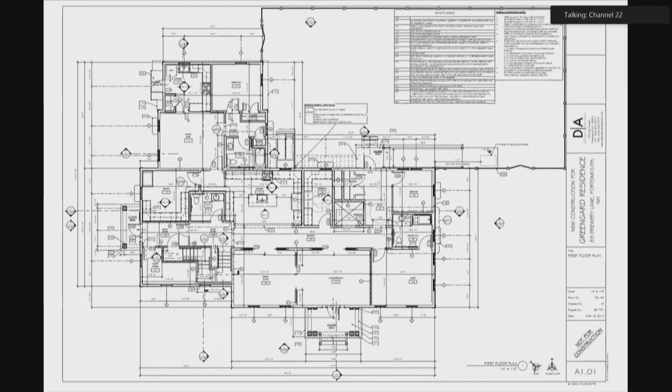If you go to the next page, and then up in the top right, you'll see—I can't read them very well from here—but the larger areas to the left, center, and lower right, those are rooms, living quarters for 4 of the existing 5. The other is on the first floor, on the page we just looked at. Up at the top right was originally the staff room. Well, the operation of the facility has changed somewhat, so there is no longer a full-time resident living in that apartment I showed you on the earlier page.

So what's happened is there's simply no need for the staff quarters up in that top right of the image, because that use is now in this old apartment where the house parent or live-in parent used to reside. There's also a formal supervisor on call now, which they didn't have back then. So somewhat oddly, we need a variance rather than a special exception to go from 5 to 6 residents. But there are other, more intensive uses that can be done by special exception—a residential care facility for more than 5 is more intensive but doesn't require a variance. So it's somewhat of an anomaly in the ordinance, in my estimation.

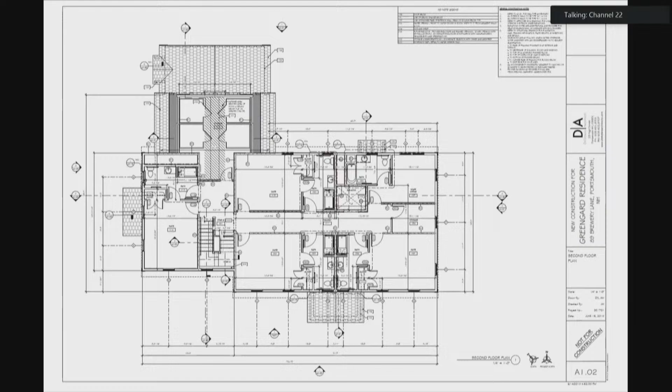You probably will hear from the parent of this young man, who I was introduced to and I already forgot her name. Before we hear from them, Attorney Phoenix, is there any questions from the board as to the presentation?

Mr. Rheaume: Thank you, Madam Chair. So taking a look at the general area zoning map that you provided, it's on page 47 of our packet. The CD4L2 that your client's property falls into mostly goes down Islington Street, then kind of makes a left-hand turn, going up along Albany Street and then onto the privately owned way. CD4W is on the other side.

CD4W, the assisted living center, is allowed by right. But on the opposite side of your client's property, the GRC, once again, it is not allowed to have an assisted living center. So I'm just trying to understand, you're kind of forming a buffer between those 2 zones. Is there anything else about the nature of your client's property that would help reassure us that the buffering would take place with the 6 residents up against the GRC properties along Cass Street?

Fair question. My response to that is that, to the best of my knowledge, there haven't been any issues between the neighbors and the existing 5 residents that have been there for now, roughly 7 or 8 years. I don't remember when it was built, but the second approval was in 2018.

You can speak to that in a minute. So the adding of 1 additional resident, in place of someone who used to have a car there and park, an adult who would be coming and going as anybody else who lives in an apartment, that's no longer going to be necessary. So the overall intensity, I would argue, is less than it was when it was approved as a special exception. Barbara or Tanya, you have to come up here and introduce yourself and make a comment.

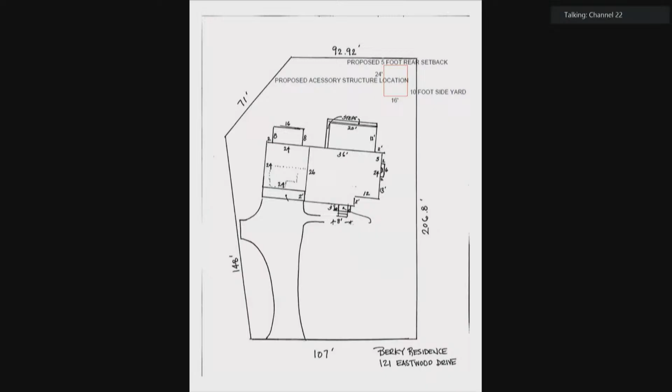Thank you, Madam Chair. Taking a look at some of the photos you provided, in particular the one on page 88 of our packet, it shows that back corner, which is your proposed location for this shed structure. I'm curious, there seems to be quite a bit of topography going on with your property. To the left-hand side of the photo, the land seems to be sloping down. Nearer to the front of the photo, you've got quite a bit of ledge, and then a higher step. What aspects of the topography are driving your location for the shed and maybe pushing it closer to that back property line?

Yeah, so as you can see, that's all ledge over there. If I was forced to come forward, that would require blasting or an excavator to hammer out the ledge, or else it would require a significant concrete wall to come up to match the ledge that's already there. So you'd have in the backyard a potential 4 to 5 foot concrete wall exposed from the ground up, which doesn't really do anything for the backyard—that would hurt everybody, having to look at that. When I bought the residence, the steps had changed; that was just a slope when we did some landscaping. But that area has been untouched, other than some stone put on top, since I've owned the residence in 2014.

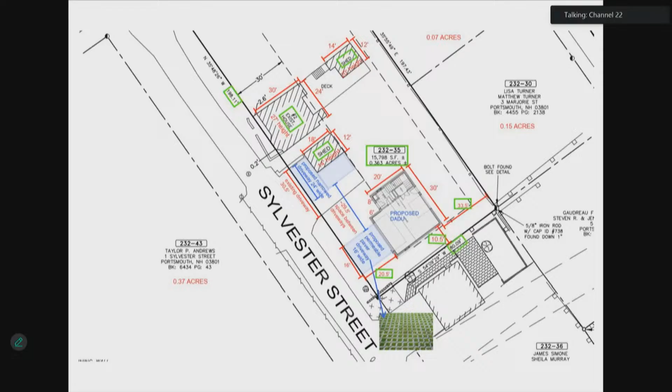Granting the variance for a second driveway for a property which has a total street frontage of approximately 277 feet would allow us the same use of the property which has been allowed to the neighbors. Thank you for your time and consideration.

Thank you, Ms. Rogenbach. Is there anybody who has any questions for the applicant?

Is there anyone here who would like to speak in favor of this application? Is there anyone who would like to speak in opposition to it? No one online? And is there finally anyone who would like to speak to, for, or against? Thank you. With that, I'll close the public hearing and open it to discussion by the board.

Mr. Rossi? I'm prepared to make a motion to approve the variance application as presented and advertised. I'll second. Okay, Mr. Rossi, your motion, please. Well, my motion is to approve the application as presented and advertised.

The accessory dwelling unit is allowed by right. The location of the accessory dwelling unit requires no variances, so it is allowed by right to be in that particular location.

I do think this is an interesting early case for us to understand that as more accessory dwelling units are permitted, we do have to consider how people will actually get to and from them. In this case, having a second driveway to access the accessory dwelling unit in its rightful location is logical. The denial of a variance to allow that would be completely irrational and would contravene the intent of allowing a detached accessory dwelling unit. So literal enforcement of the driveway provision would...

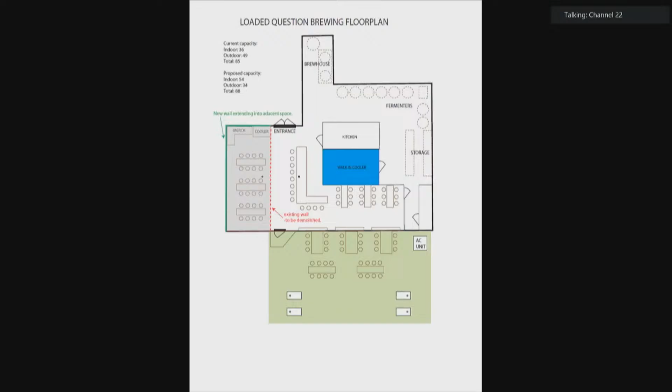One is, will there be a hazard to the public or the property from fire, explosions, or release of toxic chemicals? We're not doing anything that changes our current operations. The fire department has looked at our operations, we're considered safe, and that's not going to change at all.

There's questions about whether it'll change any of the essential characteristics about the neighborhood, including additional odor, smoke, gas, dust, pollutants, noise, heat, et cetera. Again, we're not changing any of our operations, so that will not change at all.

And because we're recessed pretty far off the road, I don't anticipate it affecting those at all. In terms of affecting municipal services, water, sewer, waste disposal, et cetera, again we're not changing really any of our operations. A few additional customers should not affect this significantly.

And then there's some questions about permeable surface and stormwater, one of the criteria we need to meet. Again, we are not changing anything outside of the building. We're adding the additional square footage by pushing into an adjacent existing space, so that's not going to affect the permeability, and it shouldn't have any effect on the desirability of the neighborhood or property values. Again, it's all indoors. With that said, I'm seeking a special exception to that. So, kept it pretty short for you. Any questions from the board?

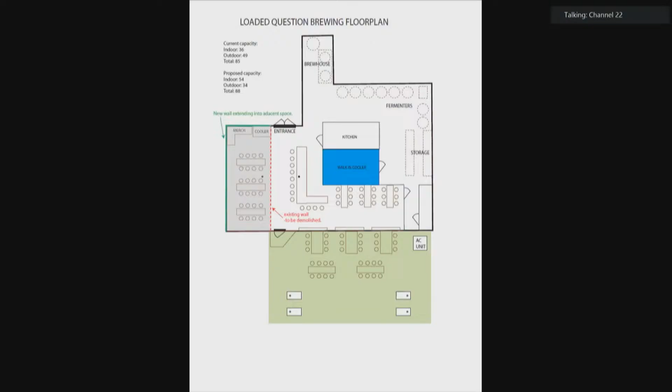I thought I was losing my mind. Nope. Any other questions from the board?

Okay, thank you. Is there anyone here who would like to speak in favor of this petition? Is there anyone who would like to speak in opposition to this petition? And is there anyone who would like to speak for or against? Seeing no one rise and there's nobody online, I'll close the public hearing.

Madam Chair, I have a question. For staff - I will not close the public hearing yet. You can close it.

On January 28th, 2025, the board granted the request to allow a restaurant which requires the following special exception: to allow a restaurant with an occupant load of 50 to 250. That was for Louis.

That was for the what? That was for Louis, the other restaurant on the property, same address, but different part of the building. Oh, I see how that is confusing. I got to clear that up in the meeting.

I thought that was specified in the packet too. It's confusing because it's the same, well, it's the same address, so. Yep, okay. Are there any other questions before I close the public hearing?

Okay, public hearing is closed, and I'll open it to the board's discussion. I'm prepared to make a motion to approve the special exception as presented and advertised. Okay, is there a second?

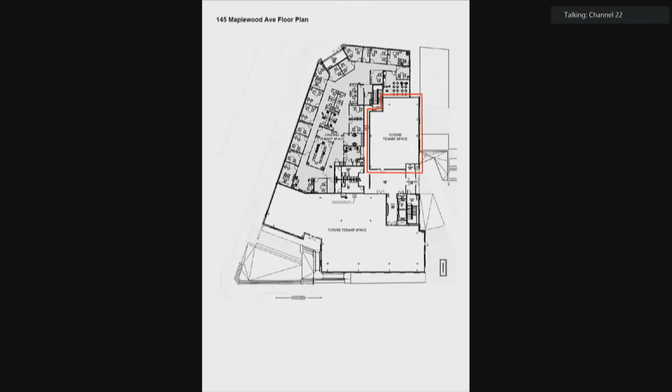Did you address stormwater runoff? I'm not sure, I kind of lost track. The last criteria is number 6. Yep, no proposed changes to the building footprint. Therefore, there will be no increase to stormwater runoff to adjacent properties or the public right-of-way.

Okay, thank you. Does anybody have any questions for the applicant? Thank you very much. Thank you, guys.

So we'll open this up to the public now. Is there anyone here who would like to speak in favor of this application? If you could just please identify yourself. Abigail Bachman, B-A-C-H-M-A-N, with Colliers, a commercial real estate brokerage in Portsmouth located at 210 Commerce Way.

I have acted as Matt's broker throughout this transaction. I just want to speak to his character and to his business. I think it's a phenomenal amenity to this building as well as to the downtown area, to add to the existing fitness uses that are there now. So, thank you. Okay, thank you.

Is there anyone else who would like to speak in favor of this application? There's no one online. Is there anyone who would like to speak in opposition? And is there anyone who would like to speak for or against? And seeing no one rise, I will close the public hearing and open it up to consideration by the board.

Board? Mr. Nies? I'm prepared to make a motion if there's no further discussion. Your motion, do we have a second? I haven't made it yet. Sorry. I move to grant the special exception as presented and advertised.

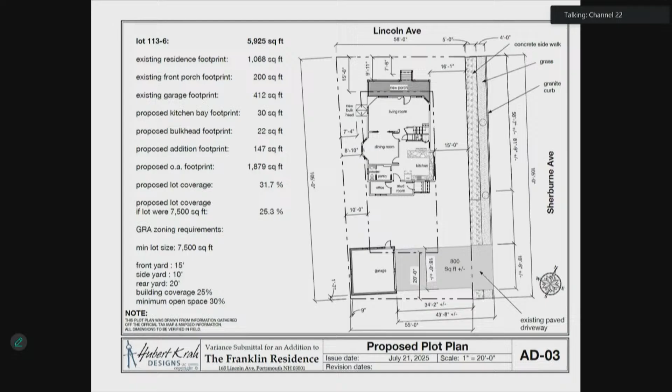Okay, great. Granting the variances will not be contrary to the spirit and intent of the zoning ordinance or the public interest. The plans call for the Franklins to actually reduce building coverage by 1.7% from what exists, so therefore there wouldn't be any overcrowding of structures on the property. I did include an exhibit as part of my written narrative that demonstrates what the surrounding building coverages are. This is pretty much in line with what the neighboring properties have. Certainly doesn't exceed the neighborhood average.

As I had already pointed out, the proposed bulkhead is really what's driving the additional setback relief that's being requested beyond what already exists on the property, which is a fairly minimal request overall. And I would just point out that the existing non-conforming rear deck, that one corner of it does encroach into the same setback. That's obviously being removed and replaced with a conforming addition, but for the coverage relief being sought. So for these reasons, the proposed improvements will not alter the essential character of the neighborhood or negatively affect the public health, safety, or welfare.

Substantial justice will be done in granting the variances. Can't really think of any public interest served by denying them. However, the Franklins would be at a loss if denied the opportunity to improve their home in a reasonable manner, such as this, make it more functional for their family.

So for these reasons, it would be an injustice to deny the variances. Surrounding property values will not be diminished by granting the variances. I would argue that the architecture improvements associated with the renovation are in keeping with the character of the neighborhood, many of the homes and structures surrounding this property. If you look at the plans, it's a very tastefully designed renovation. So for these reasons, property values will not be diminished.

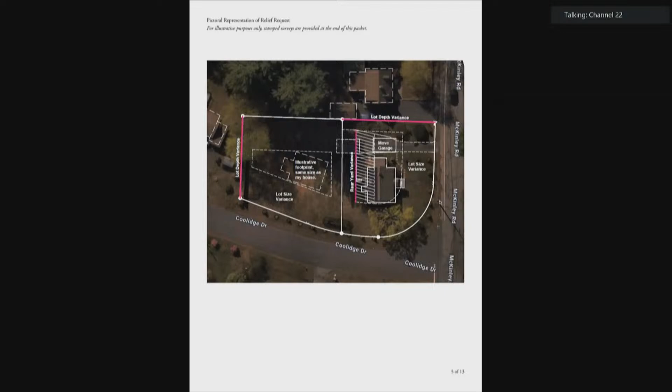No fair and substantial relationship exists between the general public purposes of the ordinance and its specific application in this instance. Single Residential B specifications are not really consistent with the neighborhood. 80% of the properties, by my extensive evaluation, have less than 15,000 square feet of land. You can see in the packet the nearby ones have a red dot on them indicating they are not 15,000 square feet. Much farther to Dondero, 0.2 acres is very common. They just get smaller and smaller.

And proposed reuse is reasonable. It passes a visual test. This is a truly empty lot, not a squeeze-in or anything unusual. And in researching this project, I came across an early John Durgan plan, number 01068 from May 1946. It basically proposed what I'm trying to do right now.

Finally, substantial justice will be done. I sit on the sustainability committee as a friend, and I think this merits just a mention of Portsmouth's Climate Action Plan, item CSLU 3, which encourages focusing on the availability of amenities and services within walkable and bikeable areas, and using regulatory mechanisms like zoning-based incentives to achieve the desired outcomes.

The planning and zoning ordinance mirrors this with notes to reduce dependence upon fossil fuels and reduce dependence on activities that harm life-sustaining ecosystems. By allowing compatible construction on already graded and cleared land in an existing neighborhood, we are making a collective decision not to continue to support suburban sprawl, not to support greenfield clearing, and not to support drive-everywhere lifestyles that burn fossil fuels, increase exhaust and sound pollution, and deprive adults and children of their independence.

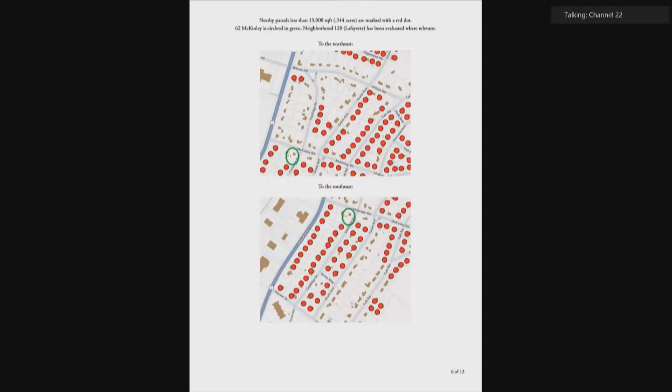This is the finest form of justice for the next generation in my mind. The requested relief allows another person to walk to Market Basket, another family to allow their children to roam a safe neighborhood and walk to Dondero, and another neighbor to enjoy self-reliance and independence that is only possible with land and home ownership. Thank you very much.

Thank you. Are there any questions for the applicant? Mr. Rheaume. Thank you, Madam Chair. So just, I was a little confused about one thing in your application on page 3 of 13. It's page 197 in our packet.

And you talk in the third paragraph from the bottom, I reviewed the entire 114 and relevant 133 neighborhood IDs in Portsmouth property database. Not sure exactly what you're referring to there. I think what you're talking about is tied to your diagram that you're showing on page 6 of 13, page 200 of our packet, but could you just explain a little bit more what your basis is there?

Certainly. I did a deep dive into trying to understand the neighborhood and the lot sizes with some automation. I'm a data scientist sort of guy.

And 114 and 133 are just references in the tax assessor maps. 114 is most of Elwyn Park. 133 is the properties that are right on the road or sort of associated with Elwyn Park, but they've been given a not-114 designation. They feel very part of the neighborhood, so I included them. The dot map that you see up there is just planning's recommendation to focus in a little closer to my house, which you can see circled in green.

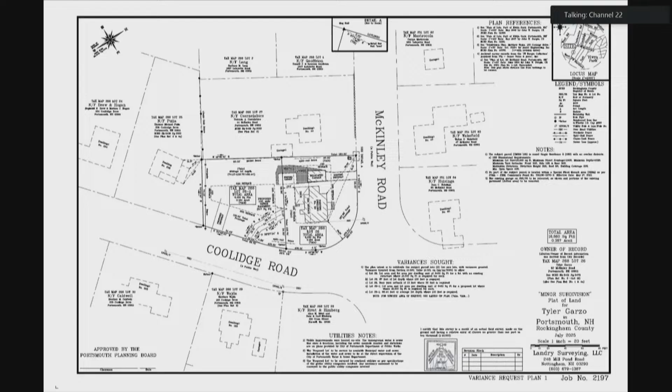That's correct. We tried to look at this as a corner lot. It doesn't quite meet that specification. There's a lot of discussion. If it was a true corner lot, we would have been able to draw a diagonal line at the corner. If you were eating a pizza, this would be the first piece of the pie that you would eat. We tried to draw that diagonal line and not make this complicated, but alas, it's not possible.

Yeah, that's fine. Thank you. Mr. Manno? Yes, and touching on what Mr. Riom said on page 197 about your research into all of 133 Elwyn Park and the houses associated with it. I especially like your graphic with the red dots.

My question is, in your research, how many of the lots in Elwyn Park are less than 8,500 square feet? Less than 8,500, around, well, under 50. More than 25, I think, is what I came up with.

25 of the, how many lots are there? There are 291. 25 or less than 8,500 square feet. I'd have to pull up the data, you can't quote me on this one. Because that's what you're asking us to decide - the 15,000 square foot lot is irrelevant to your request because you want two lots of less than 8,500.

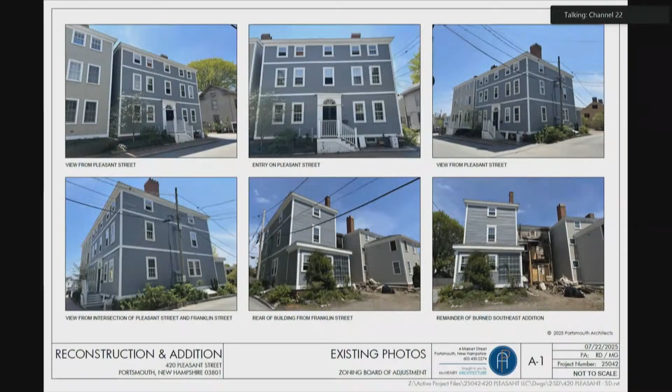Again, Tim Phoenix, on behalf of 420 Pleasant LLC. Jeff Semprini is the principal. He and Mark are in the front row to my left. The lot is 4,180 square feet. Traditionally, in a building that was built in the early 1800s, it was up to 5 residential units. Until fairly recently, a former owner lived in it and was rehabbing it and converting it to 3 units. Jeff bought it in roughly mid-May timeframe of 2025, after a fire in February.

Zoning-wise, the former owner appeared before this board several years ago. There was an addition on the back of the building that was poorly constructed and had, I'll call it, an improper, if any, foundation. They received permission to remove that and rebuild it and do a lot of interior remodeling and reconstruction. Between demolition and starting that work, which took place through early 2025, in February there was a fire. If you look at this image, this is Exhibit A to my submission, which is the Portsmouth Architects plans. The history is on their cover, but just to give you some perspective, the upper left photograph is the building, and you can see its proximity to the building to its left. That distance at the front of the building is fairly significantly greater than the distance between the buildings at the back. The far street is Franklin Street.

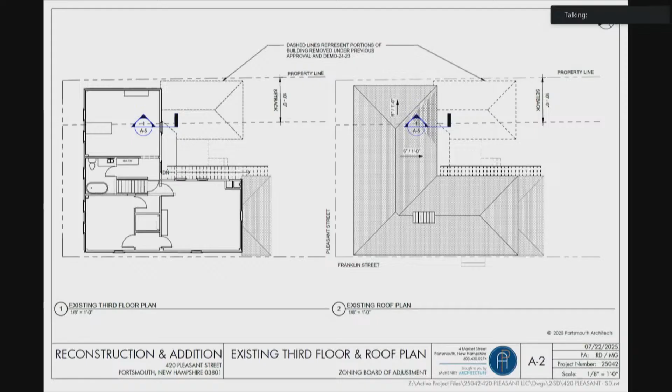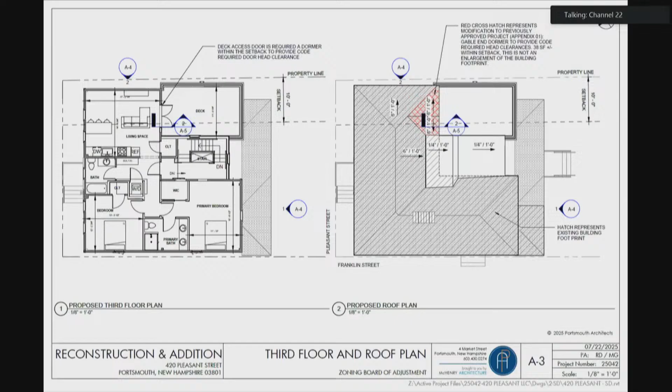That was both for safety and aesthetics. The building is sprinklered, so safety is not a code concern, but it is a livability concern because we didn't really want the second means of egress to be along the same stairway where you'd get access out to the deck. If you would go to page A4, Steph, these next two really outline what's happening.

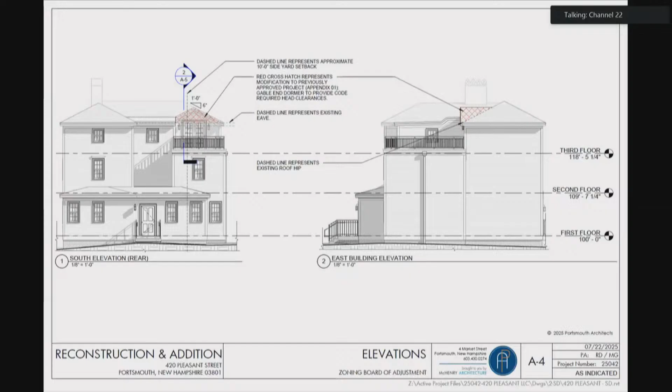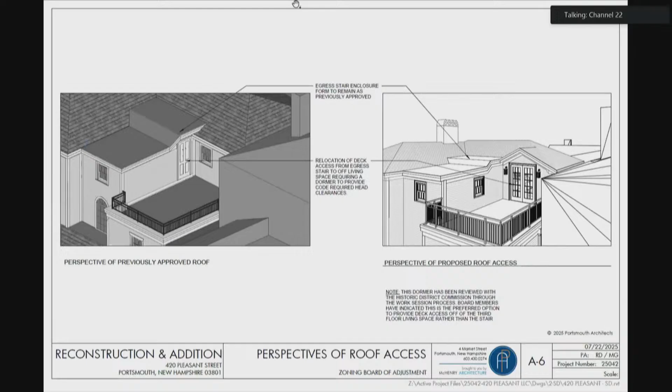I have nothing else other than to answer your questions. I don't know if Mark or Jeff want to add anything to what I've said before that. Seeing no one, have at it.

Mr. Mattson: Yeah, I just have a question, more of a curiosity. For your hardship criteria with the substantial justice, I've seen you reference Walker v. City of Manchester before, but I was wondering about Belanger v. City of Nashua, where you're saying the case represents where a variance is proper when the ordinance no longer reflects the current character of the neighborhood.

I guess I'm just a little curious. To be honest with you, Monica drafted this, so I'll throw her under the bus because she's not here. I don't know what she was thinking, but we discussed it a little bit. I did read it and was fully aware of it when it was submitted. But that case, I wasn't...

100% sure of the application of that, or Walker v. City of Manchester, frankly. But I think the point is that area has a lot of real old homes, very large, very close to lot lines, etc. So we're asking for a very small amount of relief on a building that already significantly violates the side setback, and there are, to our knowledge, other buildings in that area and on this street that are similarly situated. So an argument exists legally that if the neighborhood doesn't reflect what the zoning requires, you can get a variance for that. I'm not really relying upon that at this point. I think it speaks for itself. It's so minor, if I had to do it again, I probably would have left it out.